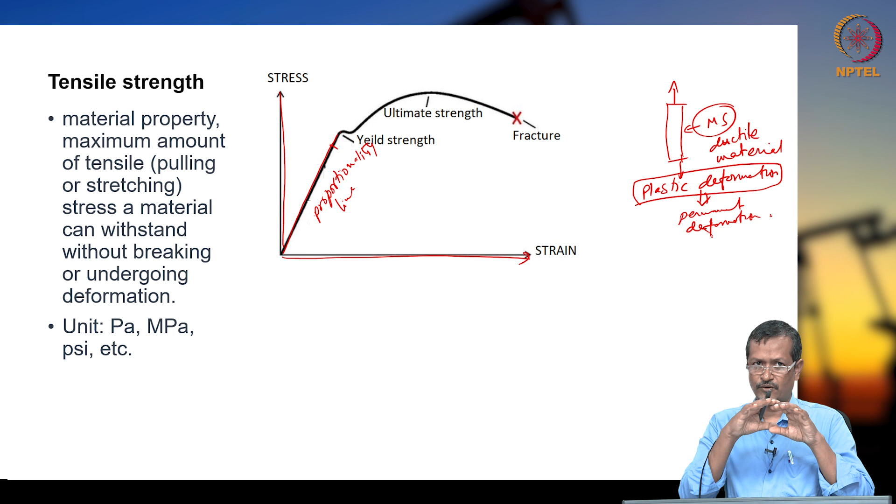But elastic deformation means it will come back to its original position. So normally whatever material or thing you design, you have to work within the proportional limit. If you go towards ultimate strength or fracture side, your system will not sustain, it will break. If you give more pressure or tensile stress beyond the proportional limit, you enlarge it more, then yielding will start. Yielding means permanent deformation will start.

Then if you enlarge further, ultimate strength will be coming. Then if you enlarge further still, it will give fracture. So whenever you are designing anything, it must be within your proportionality limit.

Material property - the maximum amount of tensile strength, pulling or stretching strength, that is called tensile strength. The maximum amount of tensile strength you are applying - if you apply more than that, then permanent deformation will happen. The material will stand without breaking or undergoing deformation, that is called tensile strength. If it is deforming, then plastic deformation is happening, and your system may not work.

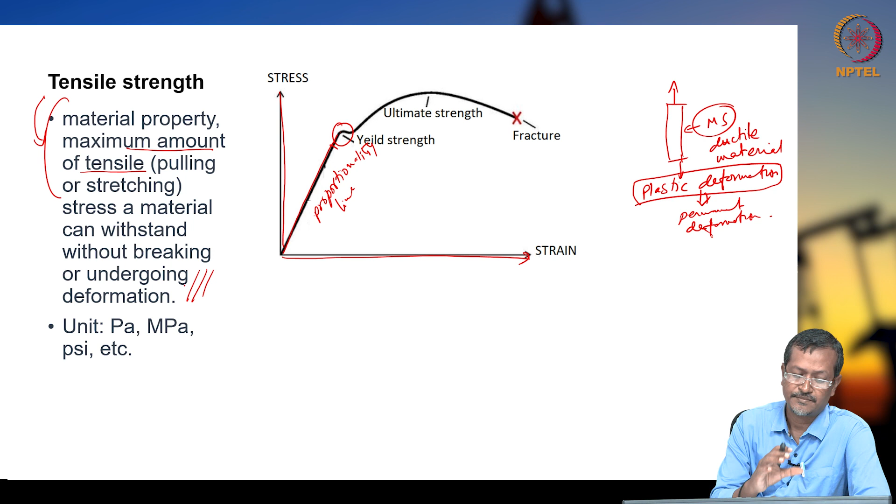So your system must be within this range. Whenever we are talking about stress, strain, or pressure, the unit will be Pascal, megapascal, psi, Newton per meter square. Sometimes you have to use a conversion factor, but units are Pascal, kilopascal, megapascal, gigapascal also possible in certain situations, psi, Newton or kilonewton per meter square - those are units for pressure or stress.

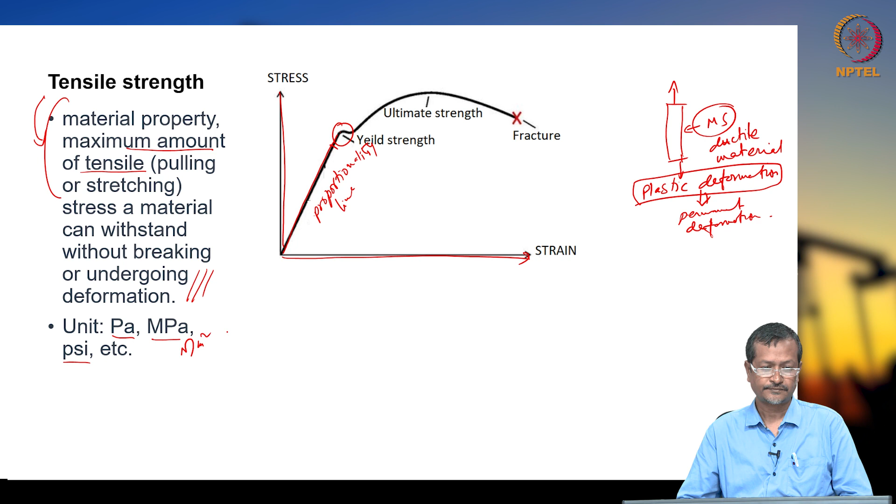Here, actually I have to tell something else. Whenever you are designing a pressure vessel, it will have different heads. You have a pressure vessel, and previously in separate designs we had drawn a figure like this, but every time you may not have that much detail in the figure. Sometimes it may have only a shell like this rectangular vessel, sometimes the end will be hemispherical - this is the head. Sometimes it will be ellipsoidal head, a 2:1 ellipsoidal head.

Sometimes a conical section will be there, and sometimes there will be an internal cone. External cone will be looking like this. Internal cone is like this - it is completely like this, and you are creating a cone inside. So outside one metal will be there, inside also there will be metal. Inside will be collecting your sand and other particles, outside will be a normal pressure vessel.

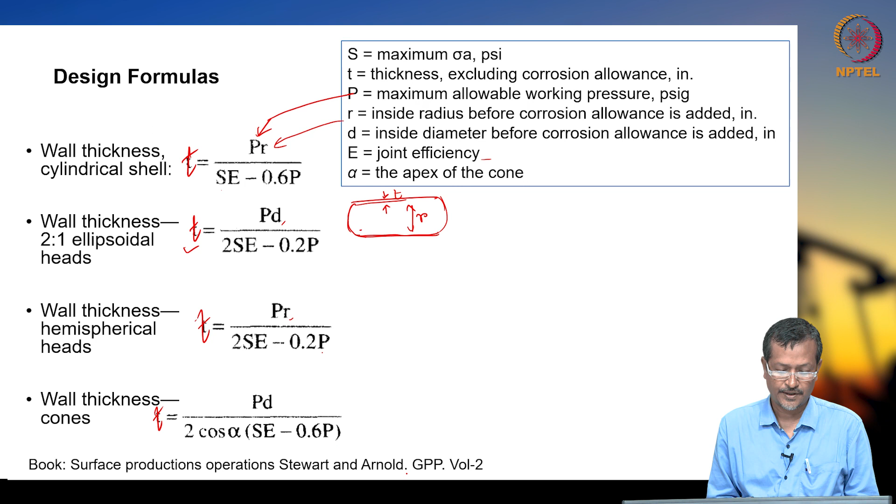T equals PD over 2SE minus 0.2P for wall thickness, and for hemispherical head T equals PR over 2SE minus 0.2P. This is PD, this is PR. Wall thickness for cone: T equals PD over 2 cos alpha SE minus 0.6P. We will use this formula later to solve some problems.

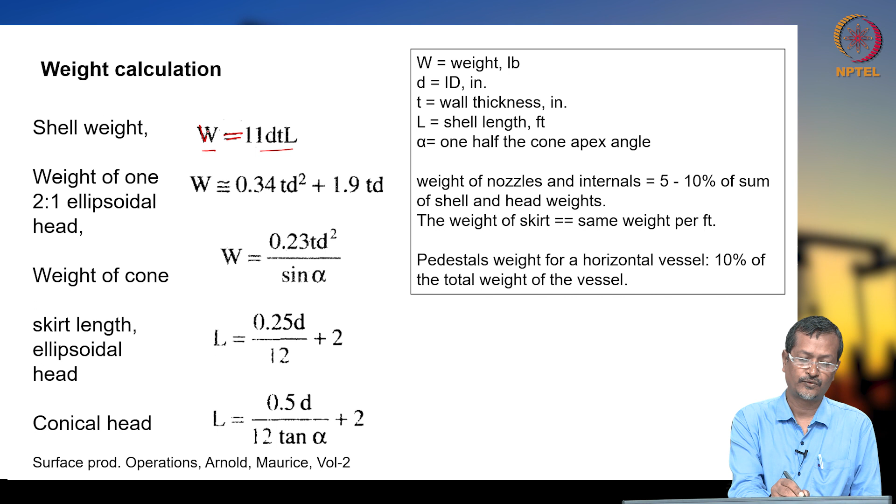From thickness we have to calculate shell weight, because weight is an important factor for design and use. Shell weight W equals 11 DTL, where D is the ID of shell and T is the wall thickness.

Normally this shell will be a thin walled shell. Thin walled means D by T will be around 20, the ratio, because our diameter is higher and thickness is lower. So D by T will normally be more than 20.

Weight of a 2:1 ellipsoidal head: W equals 0.34TD square plus 1.9TD. Weight of a cone: W equals 0.23TD square sine alpha. Skirt length L equals 0.25D by 12 plus 2. If you have a conical head, length will be 0.5D by 12 tan alpha plus 2. I will explain what skirt means later.

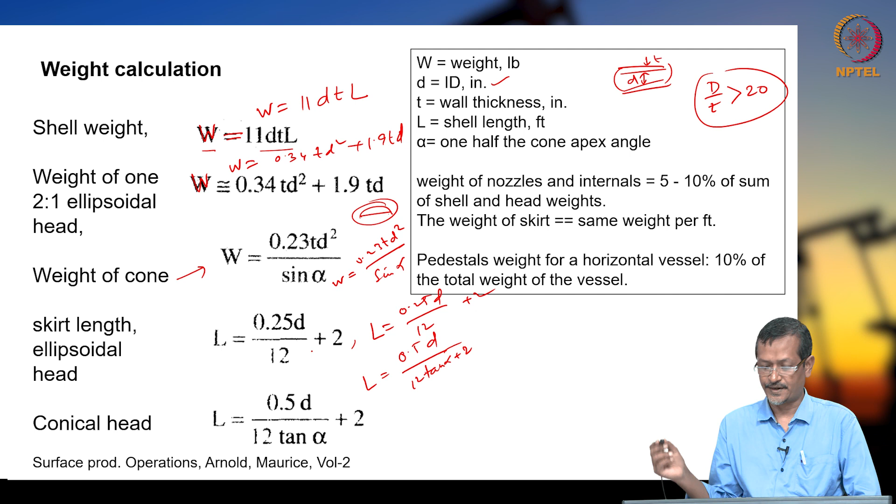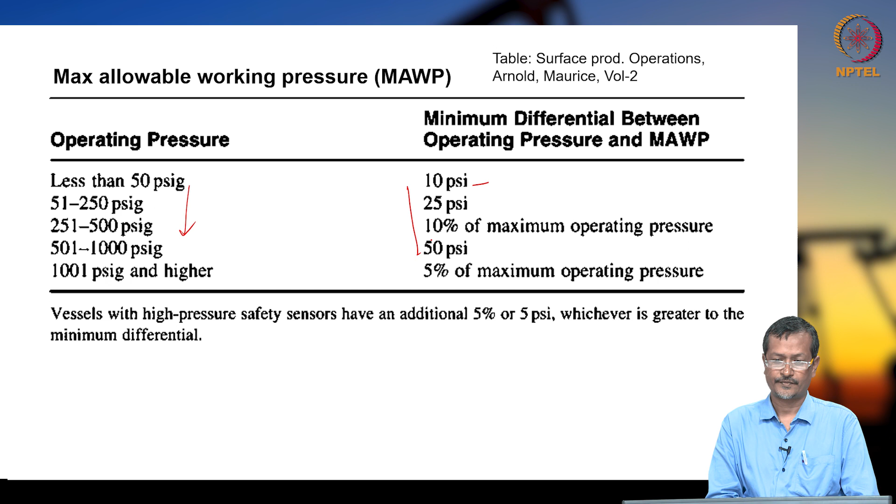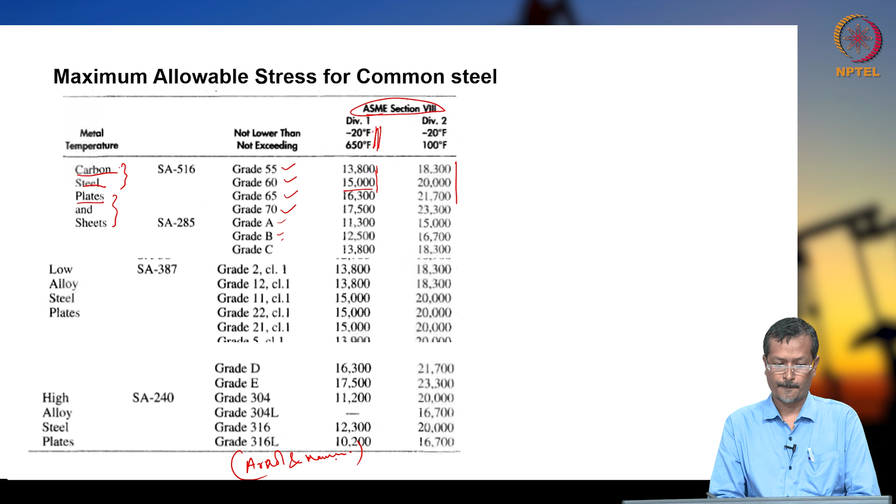This one is also from Arnold and Maurice, Surface Production Operations. Now let's discuss estimating vessel weight.

Most cost estimating processes start with W, which means vessel weight. Both empty and full with water may be needed to design foundation, lifting, erecting, and construction, since big separator systems or big vessels involve transportation and erection issues.

You fix it, then again you have to fix all the heads, pipes and nozzles, so that will be a big challenge. So you have to reduce weight as much as possible.

The weight formula includes weight of shell, then head, and another head. Internals may include a wave breaker and other things. Nozzles may be entry or exit points, and there's a pedestal or skirt where the vessel gets fixed. The bottom part should not touch the ground directly, rather it will be hosted by some metal structure called a skirt or pedestal. So when calculating pressure vessel weight, you have to include all the parts.

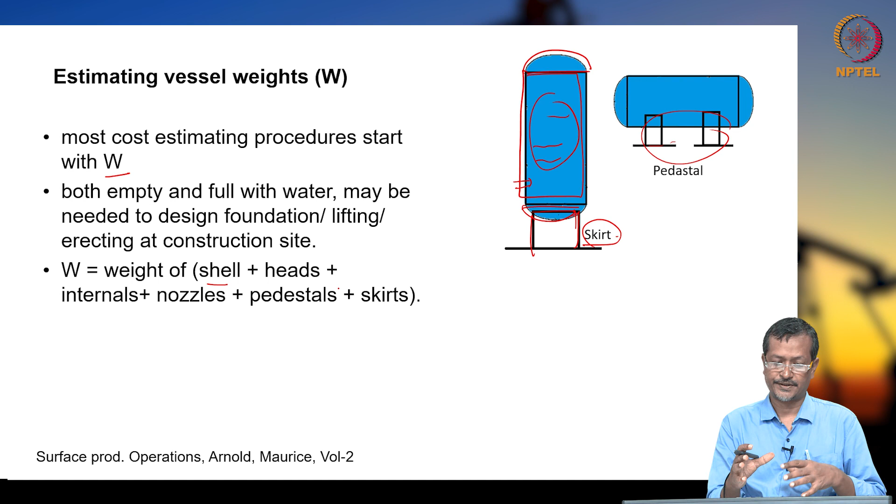Now let's do a problem using those formulas we've already seen. Using that formula, we will try to calculate the pressure vessel weight.

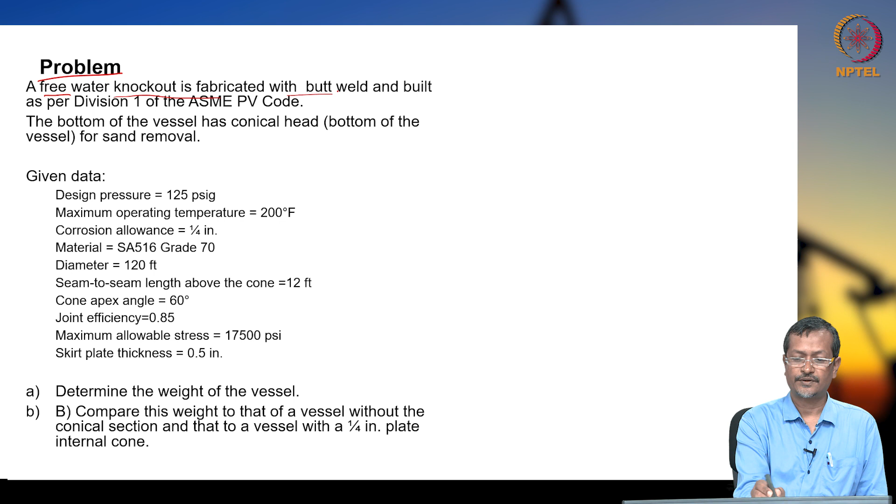A free water knockout is fabricated with butt weld and built as per Division 1 of the ASME pressure vessel code. The bottom of the vessel has a conical head. Design pressure is given as 125.

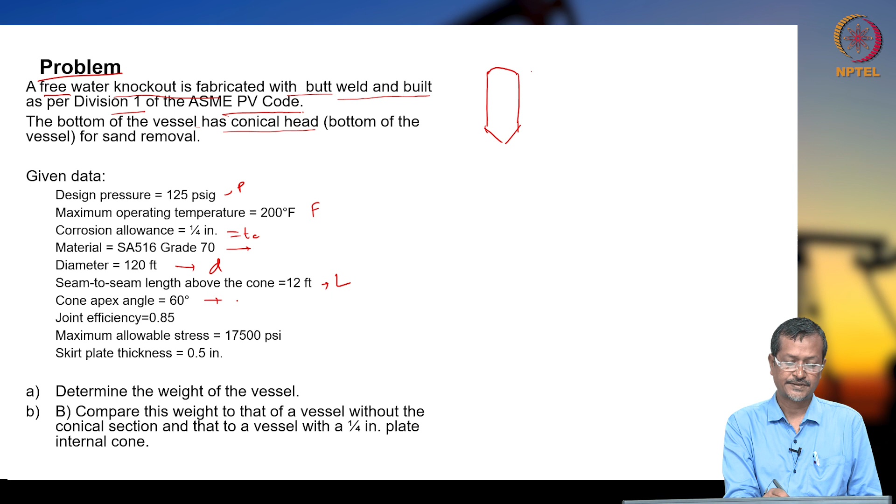Maximum operating temperature is given as 200 degrees Fahrenheit, corrosion allowance given as 1/4 inch, material is given as SA516. If some value is required, we have to go back to the table. Diameter is given as 120 inches, seam to seam length is given as 12 feet, cone apex angle is 60 degrees so alpha equals 30, joint efficiency E equals 0.85, and maximum allowable stress is 17,500.

Since 17,500 is already given, you do not have to go back to the table, so material data may not be required. Skirt plate thickness—the skirt is at the bottom—this plate thickness is given as 0.5 inch.

Determine weight of the vessel. Weight of the vessel means you have to add all the parts based on whatever information is given. Compare this weight to that of a vessel without the conical section, and to a vessel with a 1/4 inch plate internal cone. Let us try to solve this problem.

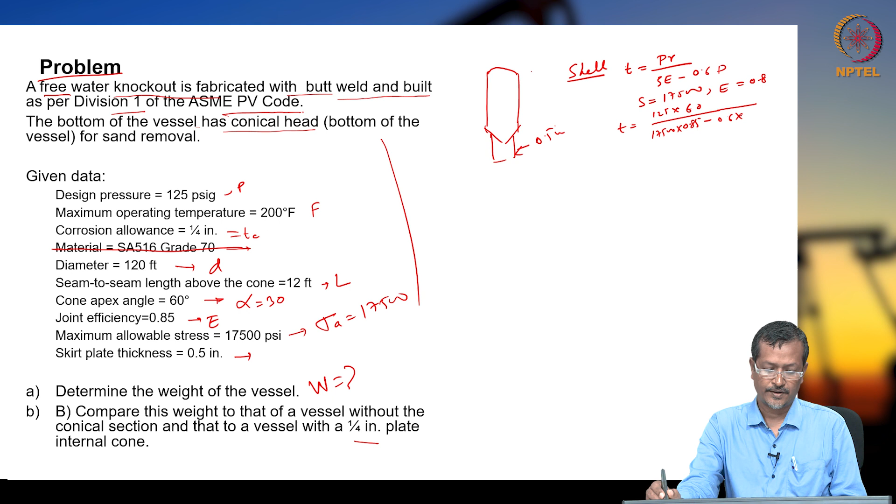First start with the shell. Shell formula: T equals PR over SE minus 0.6P. S value is given as 17,500, E value given as 0.85 (wait, 0.8 stated). So 125 into P, 125, R is D is 60 — D is 120, so R is 60, and SE is 17,500 times 0.85 minus 0.6 times P, where P value is given as 125.

This gives 0.507 inch. But you have to give allowance for corrosion, which is given as 1/4 inch, so you add 0.25. So TC is given as 0.25 inch... wait, total thickness equals 0.25 plus 0.507, which comes to 0.757.

Okay, inch. Now, weight of this shell, weight equals 11 DTL equals 11 into D 120, already given. T is 0.757 into 12 equals 8027.027 pound.

Now you have calculated shell, now calculate head. So for head, again use the T formula, equals PD divided by 2SE minus 0.2P. That gives 125 D 120, 2 into S value 17500 into E value 0.85 minus 0.2 into 125. So this gives 0.505, and T total equals 0.505 plus 0.25 for corrosion allowance, so it comes to 0.755 inch.

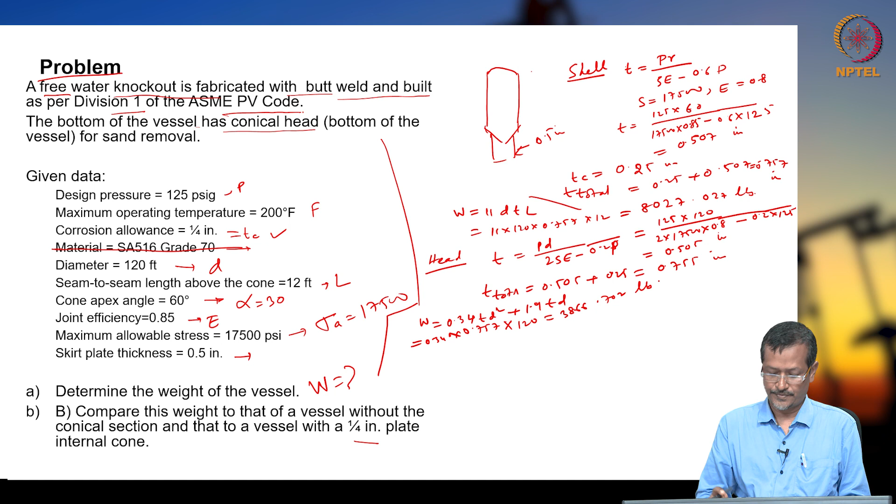Now weight equals 0.34. Weight equals 0.34 T d square plus 1.9 T d. So this gives 0.34 into 0.757 into 120 equals 3866.702 pound. Now we'll go to next slide because slide is filling up.

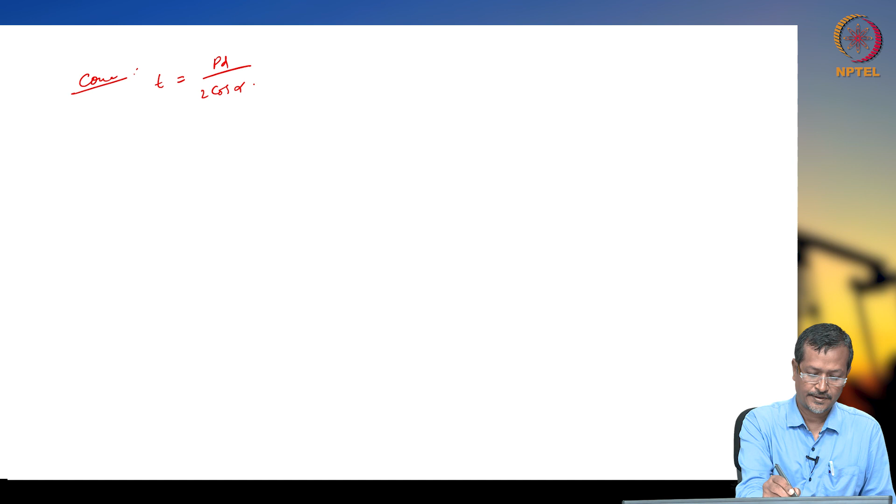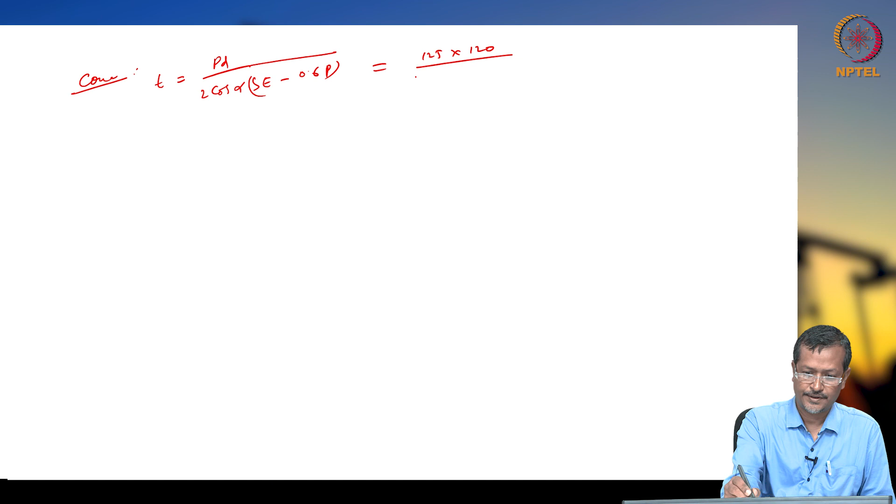Okay, now cone. So cone gives T equals PD divided by 2 cos alpha SE minus 0.6P. Putting the values: 125 into 120 divided by 2 cos 30, then 17500 into 0.85 minus 0.6 into 125. This gives 0.585 inch. Now thickness T total equals 0.585 plus 0.25 equals 0.835 inch.

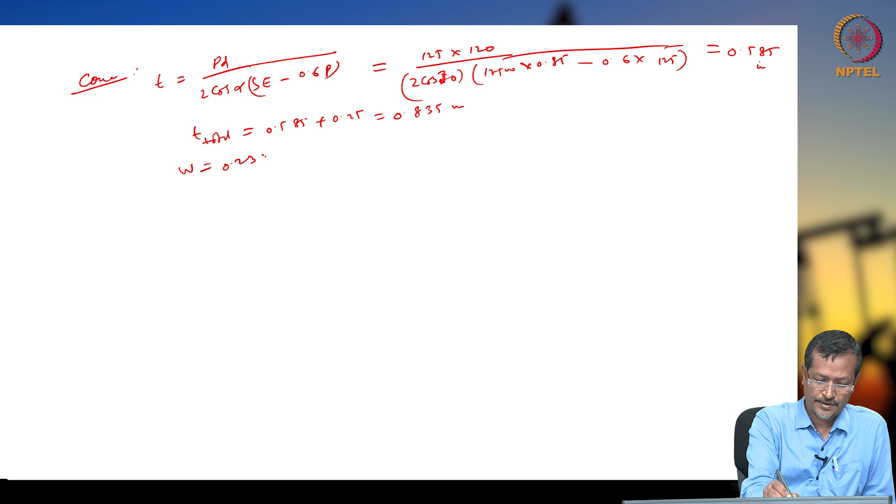Okay, so weight of the cone system is 0.23 into T d square by sin alpha, as per formula. So this will be 0.23 into 0.835 into 120 square divided by sin 30. So it gives 5532.049 pound. Now skirt.

Okay, skirt conical head. So L equals 0.5 D by 12 tan alpha plus 2. So this value will be: 0.5 into 120 divided by 12 into tan 30 degree plus 2. Okay, H equals height, because of this shape you have to calculate height also. So A, B, C, this is alpha, so AB equals height. This is actually 60 degrees. So this value comes to 10.66 feet.

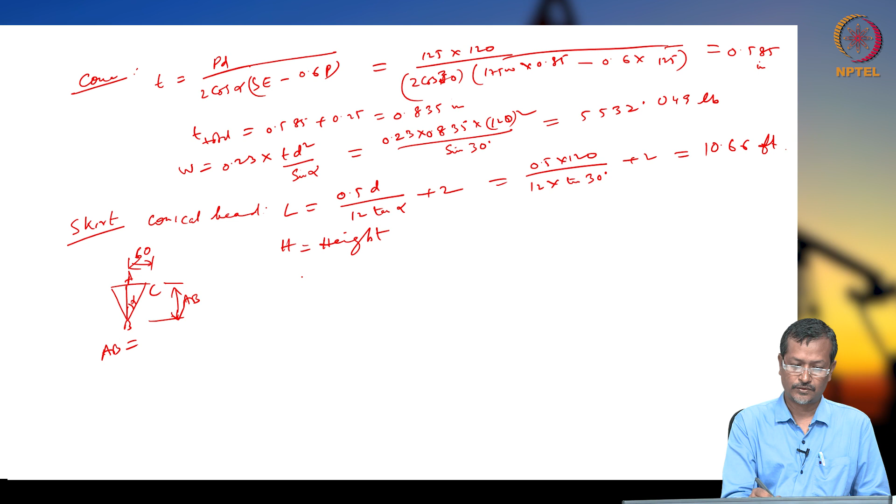Okay, now H, now W equals LDT into 11, equals 11 into 120 into 0.5 into 10.66, giving 7035.77 pound.

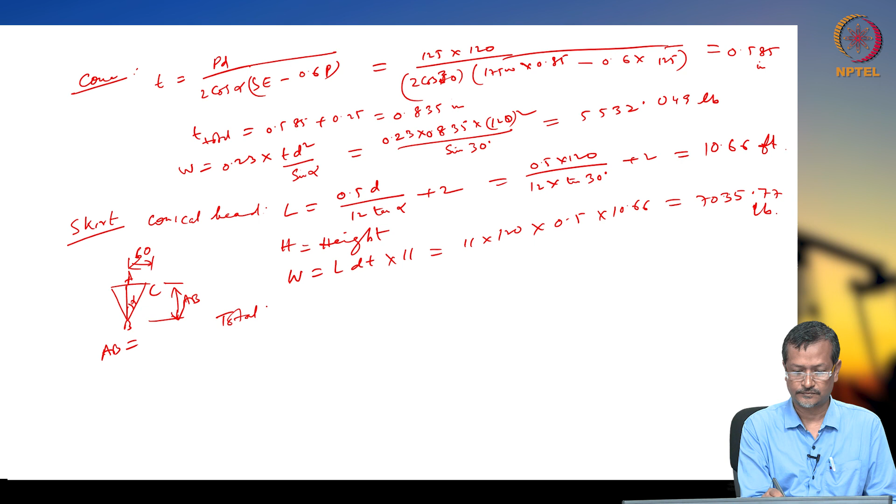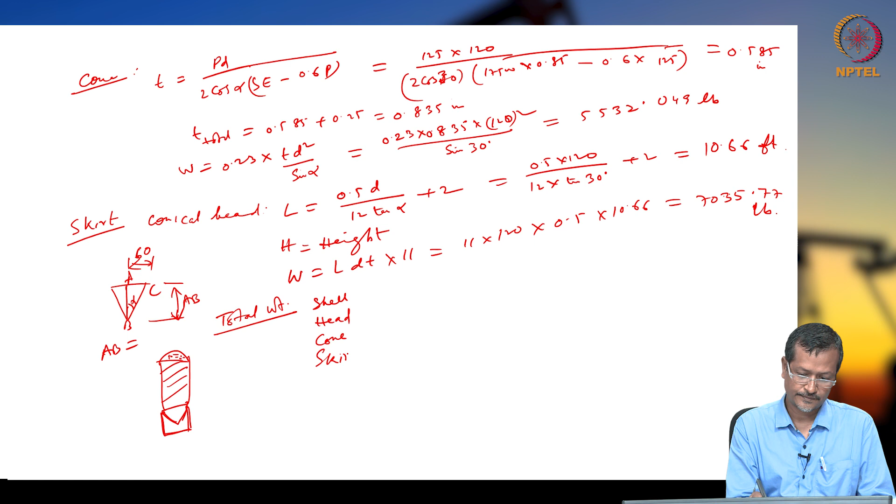So total weight: shell, head, because it will have shell, then head, then cone, then skirt. This is shell, this is head, this is cone, then skirt. All weight we have to add: shell, head, cone, skirt. Shell weight is 11987.03. Head weight is 3866.70. Cone weight is 5532.05, and skirt weight is 7035.77. So total weight of the whole pressure vessel is 28421.55 lb. Now case 2.

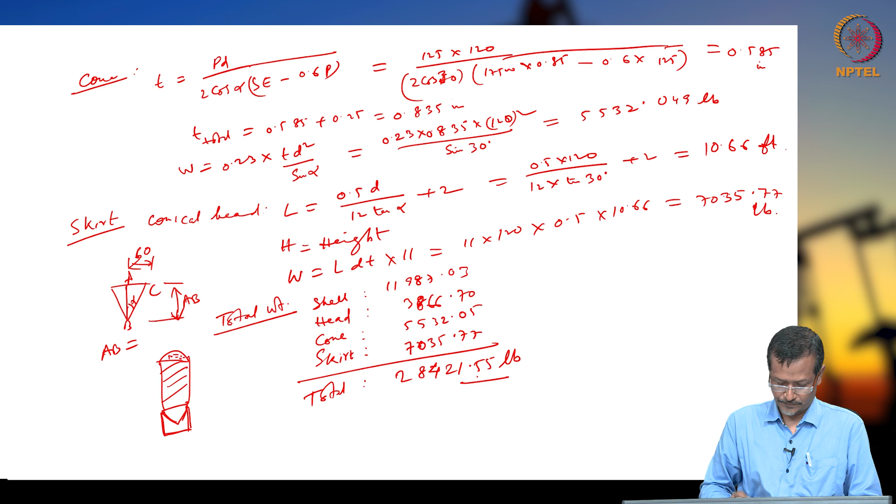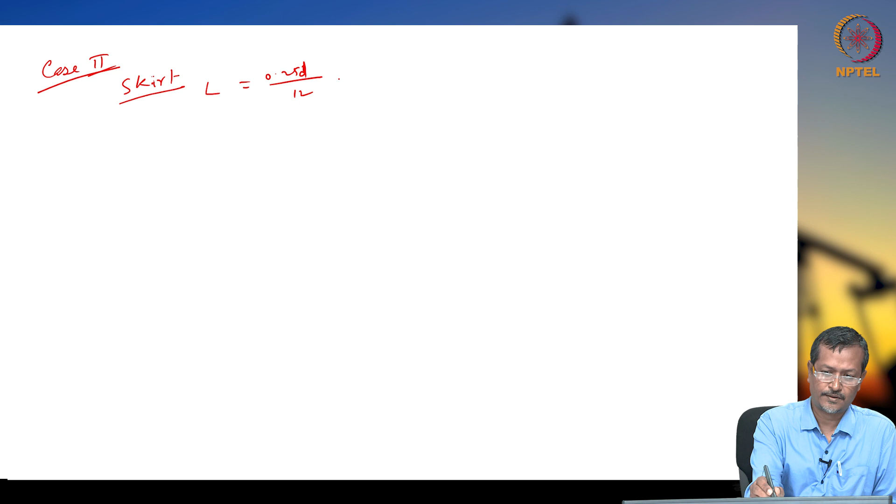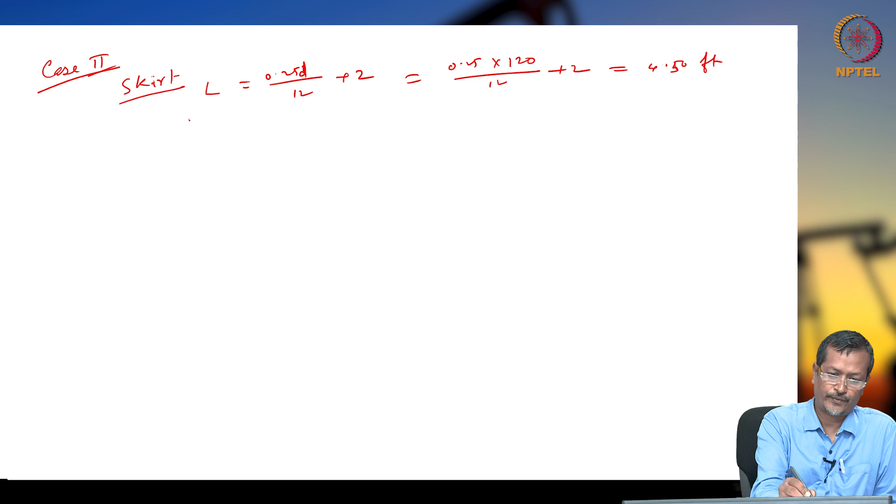That was case 1. So case 2, skirt is changing. Skirt length equals 0.25 d by 12 plus 2, which is 0.25 into 120 by 12 plus 2, so it comes to 4.50 feet. Now weight is 11 into 120 into 0.5 into 4.5, so 2970 pound. So now summary.

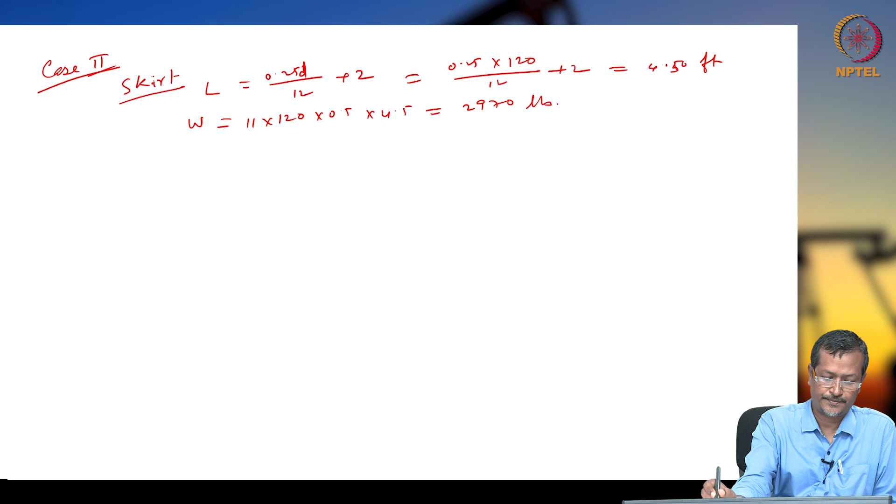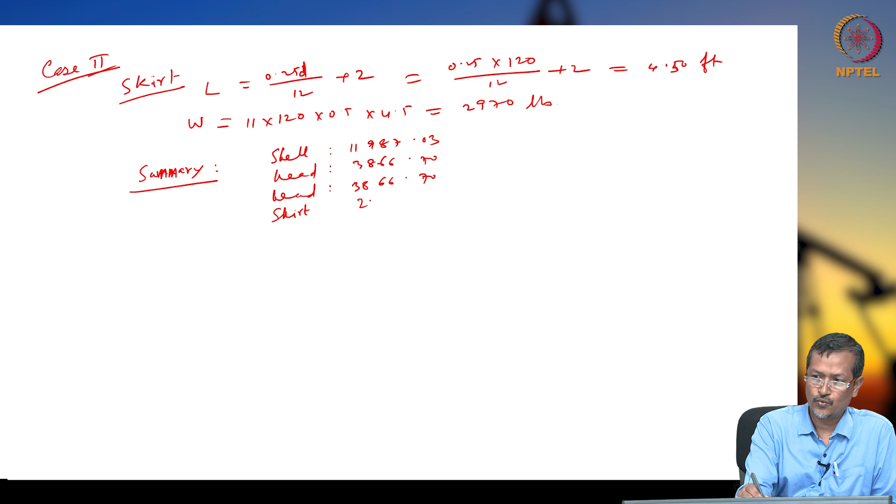Summary is like this: shell, head, two heads are there, so skirt. Shell weight is 11987.03. Head weight is 3866.70, same head 3866.70, and skirt weight 2970. Altogether it comes to 22690.43 total weight in pounds. Okay, now another case is there.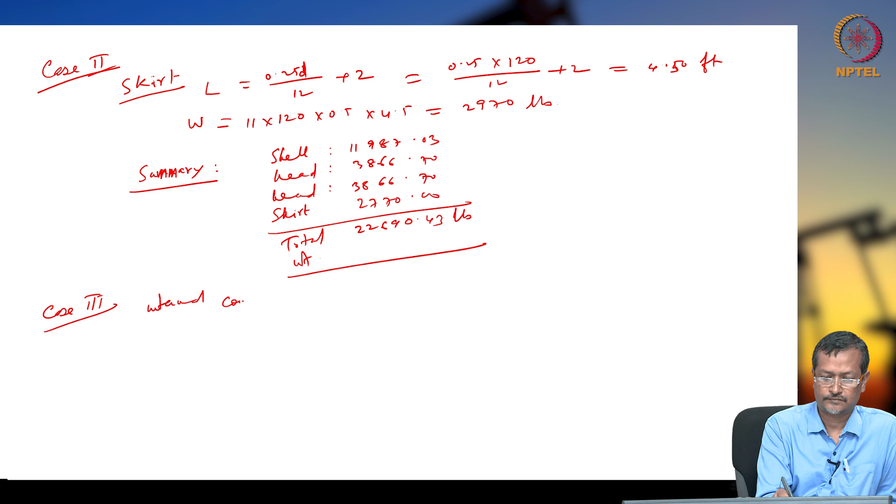Case 3 shows internal cone. Internal cone weight is 0.23 t d square by sin alpha equals 0.23 into 0.25 into 120 divided by sin 30 degree. So this gives 1656 pound.

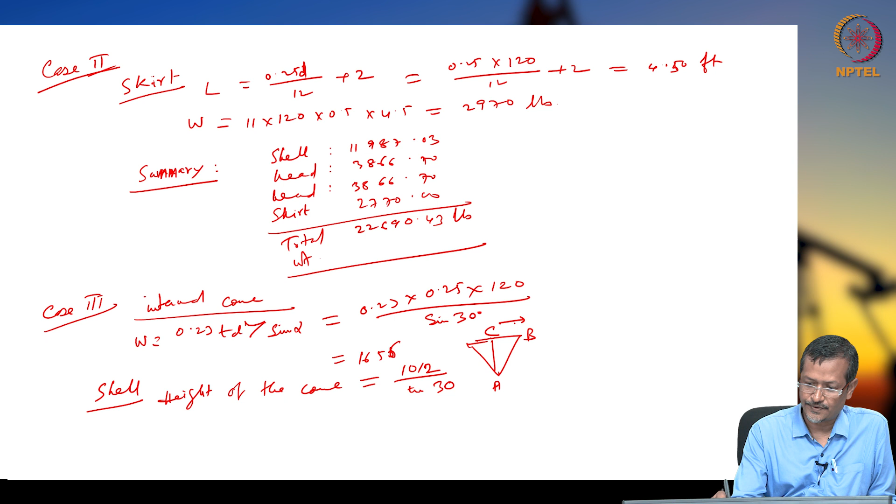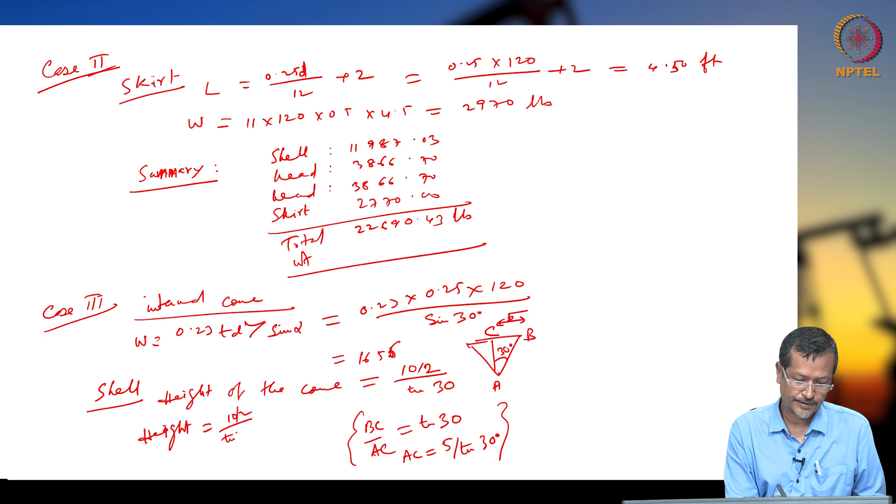Now shell, this internal cone shell, height of the cone equals 10 by 2 radius divided by tan 30. So it's like this: A, B, C. This is 5 actually, 10, this is 5, and this is 30 degree. So BC by AB equals tan 30. So AC equals BC by AC, not AB. BC by AC, so AC is 5 by tan 30. And from there we get height, so height equals 10 by 2 by tan 30 equals 8.7 feet.

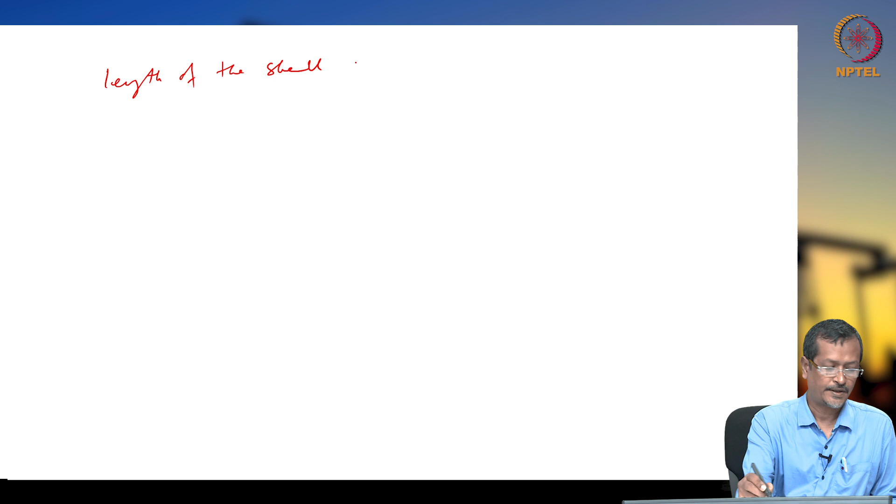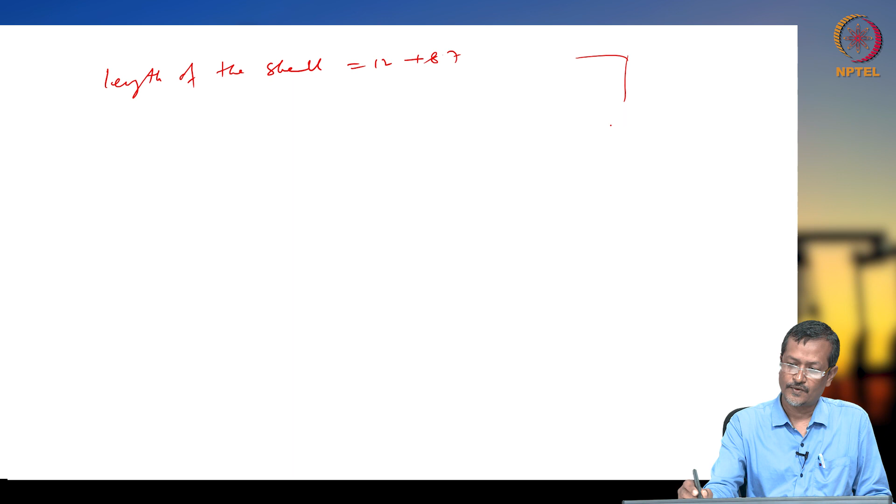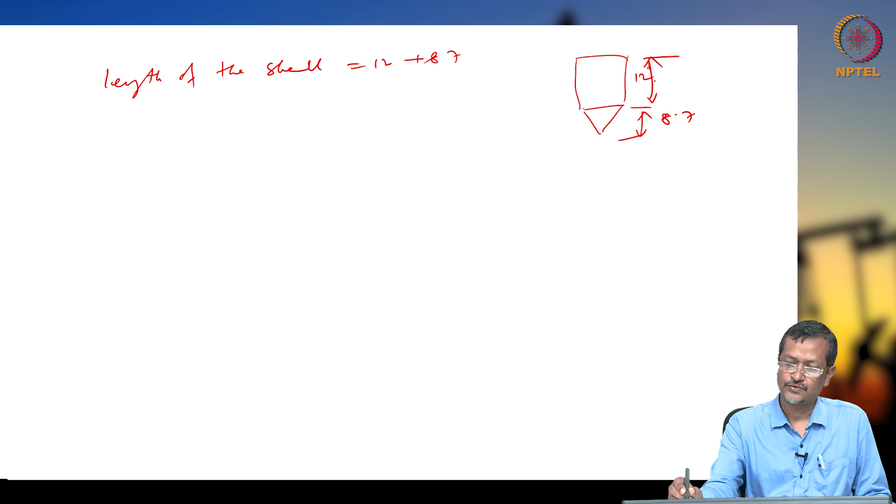Now we go to next slide. So length of the shell is 12, already given, plus 8.7. How is it like this? First it is there and your skirt is coming here. So 12 is there and 8.7 is your cone height. Cone height is there and previously it was 12, and this is cone 8.7, this is 12. So it comes to 20.7 feet.

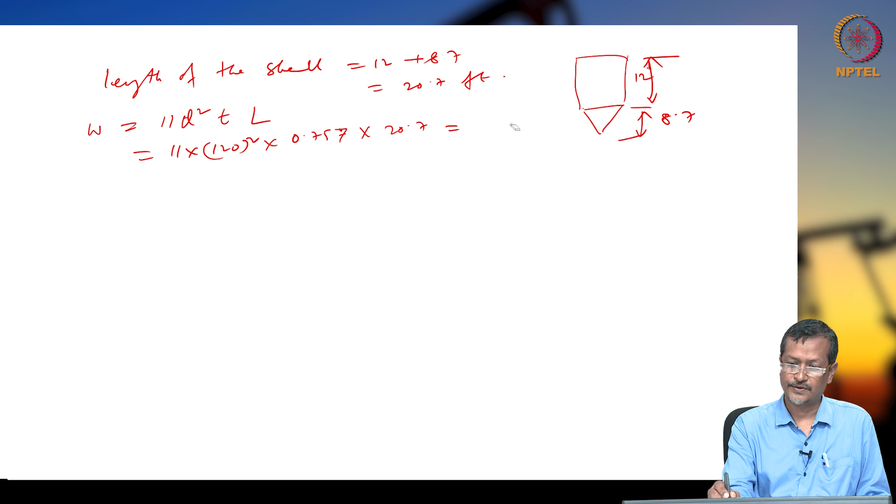Now weight of shell W equals 11 D square T L. So 11 into 120 square into 0.757, which we got from the previous slide, into length 20.7. So this value comes to 20637.9.

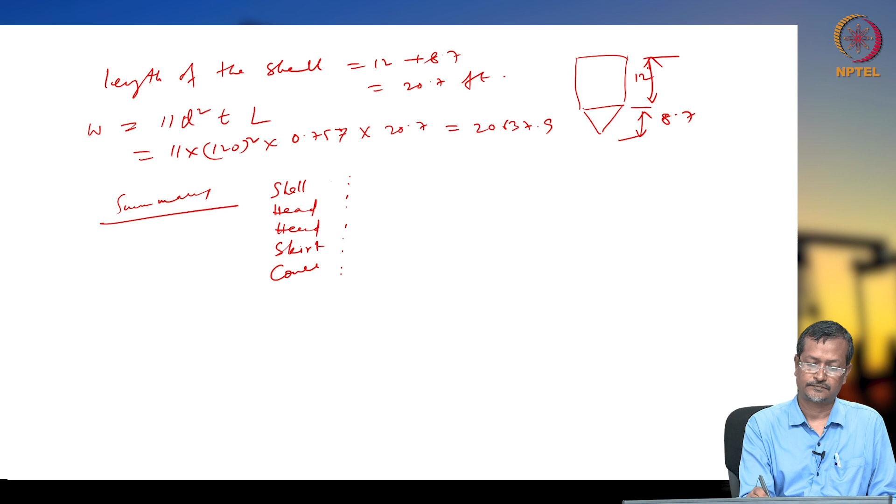Okay, now summary. Shell weight, then head, skirt, cone. Shell weight is 20637.9 and head weight 3866.7, 3866.7, and skirt weight is 2970.0, and 1656.0. So altogether it comes to 32997.3.

Okay, so you can see the difference. If we change design, the weight is changing. Thank you very much for this lecture.